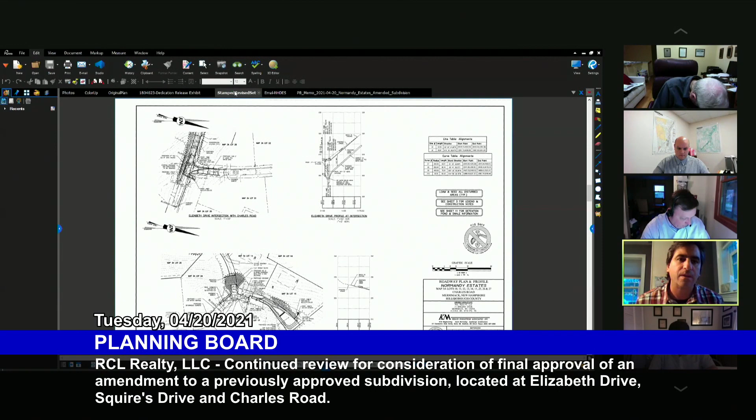Actually, first let me explain the utilities. The reason that this applicant originally came with overhead electric is that the underground electric in this neighborhood currently is not able to be utilized. The power company will not touch it. So that is why the plans originally had overhead coming down through the site. But listening to the abutters at the last hearing, plus board members, obviously, I'm here telling you that things have changed and you've got to give a little leeway to us.

Well, at the same time, things have changed and it was underground back in 1969 instead of above ground. So we agree that it makes sense to go underground here and keep it consistent throughout the neighborhood. So that's why we started originally with the overhead, but listening to what's there, we agree to go with the underground electric. Thank you for doing that.

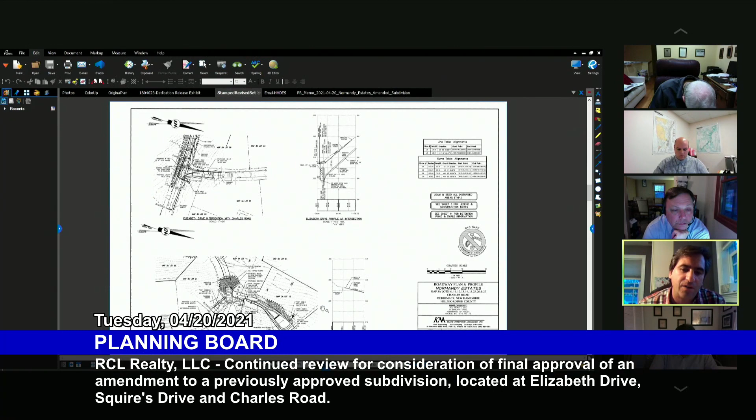At the last hearing, as Steve Keach has presented to you guys, and I did it the last time, we all kept saying, well, it's only 15 feet for 9%. I think the abutters brought up that the waiver is actually for above 8%. Where does the 8% happen from? So we went into the profiles here, and basically at station, it's right about 349. Right about here, as it goes under 8%, it gets like 7.94.

And then on the other side, it was 475. So it's about right here where it starts flattening out. So that gives us approximately 125 feet at over 8%. So instead of 15 at 9, it's 125 over 8%.

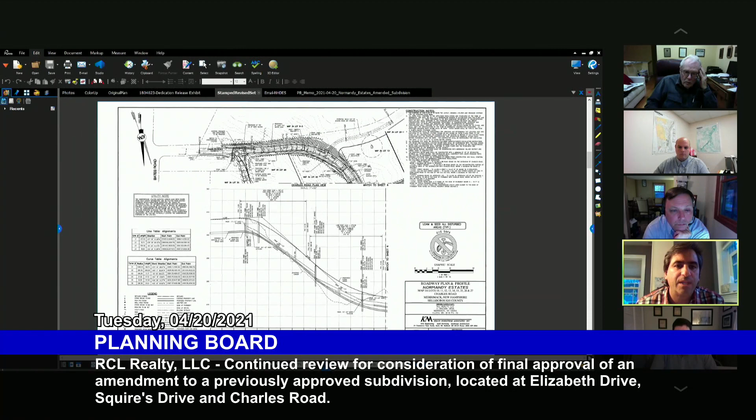The other location, and again, this comes back to Elizabeth, currently right now is a straight road through. And going through this process with DPW, we propose to tee that up at this location here. So currently, the dotted line is the current. Currently, it's about 9.1% as it comes up and around the corner. We're able to reduce it to 8.69 and create a stopping distance so that people are not cruising around the corner. And that is the waivers that we're asking for on the 9%.

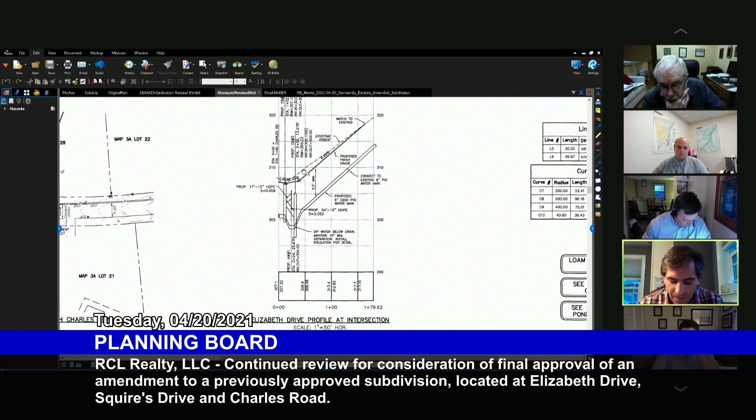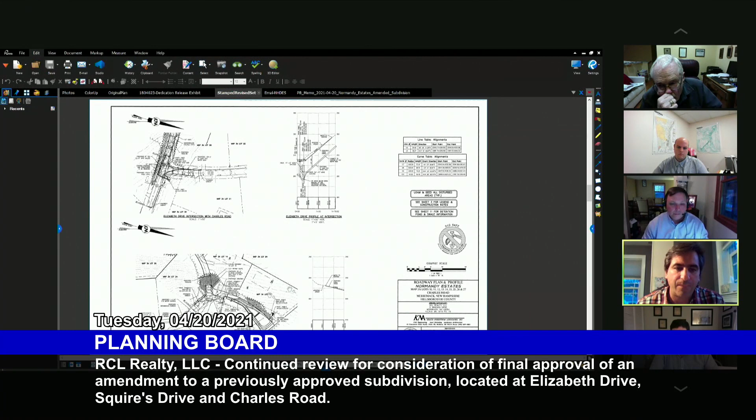The other one is related to cul-de-sac length. And that one is kind of clear here. Again, the total length to this point here is 1,450. We're allowed 1,200. So again, we're not coming down the majority of it from the cutoff on Elizabeth down to this road here. At the end of the cul-de-sac here is approximately 1,250. There's 1,100 right here. And from the end of Elizabeth, we start with our 0 at this point here, 150. So it's about 200. So our new road is approximately 900 feet out of that 1,450 distance.

Again, we're basing this development and design off the plans from 1969. Like I explained at the last hearing, we're moving a lot in this location here, combining them with doing some right-of-way stuff here, making the curve come down, obviously redoing Squires and cleaning up Elizabeth Drive at the end. Again, this has been a balance between working with DPW, the town, and staff to come up with something that fits a project that was approved back then, was half built out, and has rights to be finished and built out.

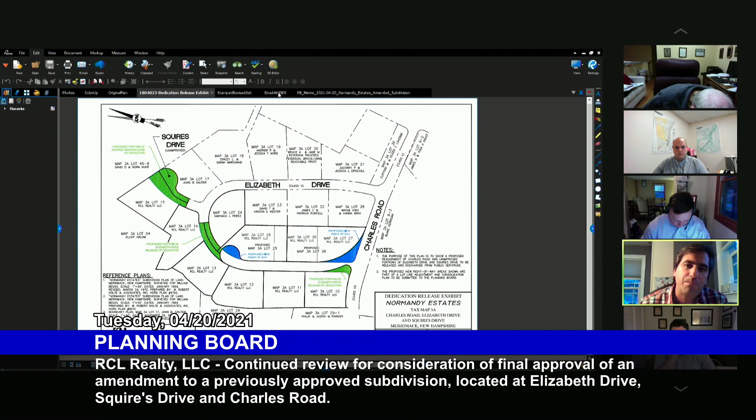Currently, from a review standpoint, we've gotten this email here from Gloria Andrews. She works at DES. She's reviewing our alteration of terrain permit. She had asked for a couple things on the sheets down in here. We had given them to her. All looks good. I'll put you on the expedited list for the New Hampshire Fish and Game.

I'm not sure if the board knows what happened last June with the New Hampshire Fish and Game, but they required everybody to do a wildlife study on their properties that had an alteration of terrain permit. They only had one person to review it. So currently she's got 16 applications in front of her, but we are all set from the drainage standpoint, the alteration of terrain standpoint, and she's working through the reviews. We had gotten some comments back in December, got them back to her December 18th, and are just waiting for her to work through.

I think that's my presentation tonight, and I'll take any comments or questions that you guys have and work it through from there. So thank you. Thank you, Matt, and thank you for taking into consideration the feedback you got from the board and the abutters with respect to the waiver request about utilities. I agree with that choice. I think that was a difficult waiver to support given what we require of other neighborhoods. So thank you for withdrawing the ones about underground utilities. And we'll take up the other ones that you requested in a little bit.

I want to let other board members have comments or questions about anything to do with the application, and then we'll talk about the waivers. Any comments or questions by members of the board? Let's see, I've got to arrange this so I can see all the names. Nelson, I see you. Well, just to follow up, I thank Matt for the changes he's made. I've got a couple of questions on it. I don't know if you want to go into those detailed questions now, but I agree with the suggestion on underground utilities. I think that's where I wanted to go, and it makes sense with what's there already, that we can continue that on the new Charles Road.

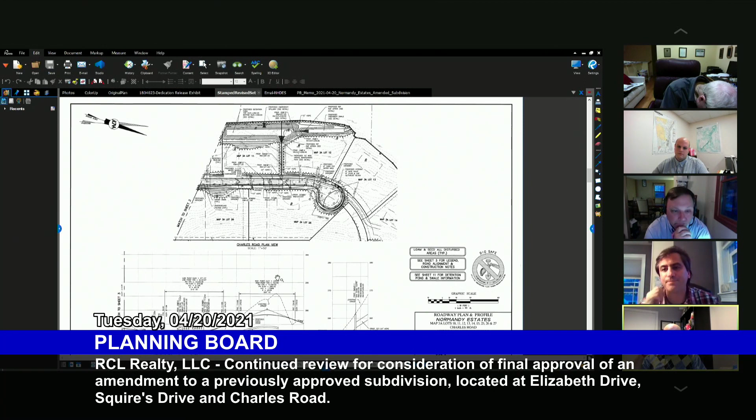And I'm looking at sheet 2 of 13 where parcel H, I think parcel H has that 10-foot wide pedestrian easement, but it still looks like that parcel J is going to be released from dedication. I guess, has that conversation been had? Is that still something fluid? Is it Pollyanna-ish on my regard to still float the idea? I guess I just would like to know what the applicant's perspective is on that, and then whether or not

it has a future. So I went and sat down with staff at one point to see what their thoughts were first. And it was something at the end of a road that doesn't make sense there. And then I talked to Greg Michael on how, again, it's the same problem I had with the detention pond on that piece beforehand. I'm encumbering it before I give it back to 3A lot 17. Those people are more than able to give it back to the town or do a conservation, do something like that if they would like to after the fact. But I cannot encumber what is their land to the center of the roadway at this point.

And that's why I had to put the pond over on this side from our last application and get everything completely off of that piece there. And this piece here, which goes back to 3A24, because again, that was a nice little spot to kind of come up and around that way. So I can't encumber their rights. They could come and do it, but I didn't have the ability to work with them, obviously, in this project. So what you're saying is that 3A17 still retains the fee to parcel J? Yeah, they'll be getting this parcel back. Have the owners of 3A17 been made aware of that? I do not know. I don't have an answer to that. Okay.

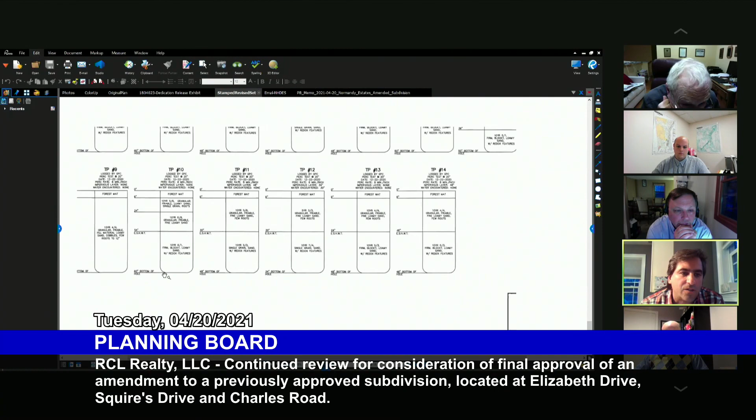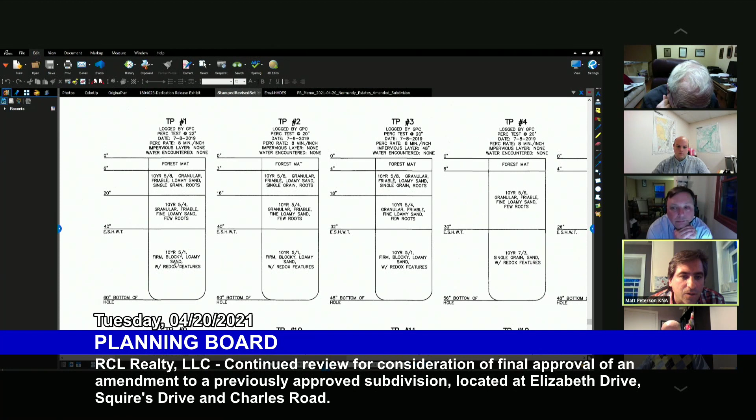Yeah, seasonal high waters average about 26 inches, 30 inches, 32, 40. That's pretty average, 36. Yeah. You get down here, we had one that was 24, 46, 54. Bottom of hole, 48, 60 inches. So no ledge hit there. So pretty standard. Yeah, no ledge, huh? No, I mean, you got loamy sand, granule loamy sand, and then a loamy, nothing where these ones were. Yeah. Okay, it may be something that goes back to the ancient past then that they were referring to.

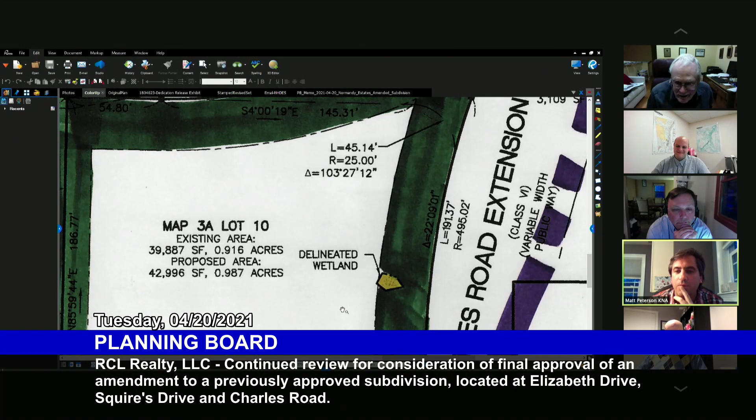I did want to talk about the other thing: are there wetlands anywhere on this site? Yes, I have one wetland on site. Okay, where is that? Right there. Oh. About 93 square feet. And I had to put a buffer around it of a 25 foot and a 40 there on the latest plans.

Okay. 93 square feet. Throw a bag of kitty litter in there and no, don't do that. No, don't do that. Yeah.

The existing Elizabeth Drive, was that built to town standards? The road that's in there. Not current town standard, because it's over 9%. I meant more in the subgrade and the foundation for the road. I don't have that answer for you. You don't know, but it's not your intention to do anything with it. But the new road you will build to town standards, the new Charles, and it will have the proper subgrade.

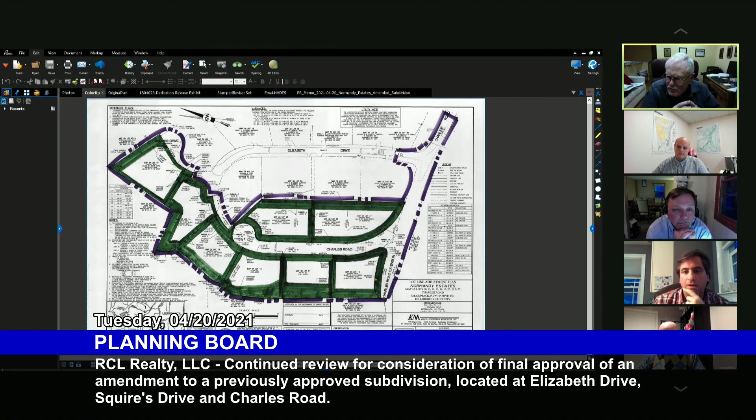There's a question about subgrade depth. Obviously, we're replacing this in here up to there, and then replacing the end with the turnaround here. And like I said, we're picking up the drainage to get drainage off the road and stuff like that. But no, the section between here and here was probably put in 1970, 72. I don't know. Yeah, and you will do current standards on the new Charles down south of, or I guess to the east of this. Yeah, I'm not asking for any waivers on that. No, okay.

The existing, has the town accepted Elizabeth as it is now? Is that an accepted town road? Would have to have been. They're maintaining it, yes. Well, yeah, I thought they probably were, but I just didn't know where their acceptance was. Wetlands, we've taken care of the wetlands.

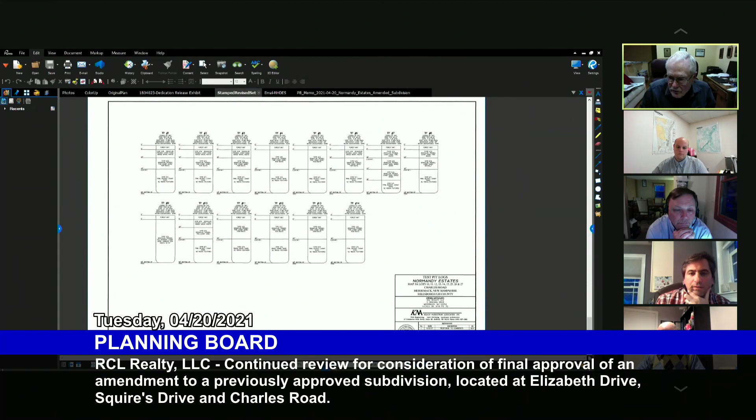There were issues with the, I think it's the cul-de-sac on Charles, where they talked about the drop off from the cul-de-sac and the presence or absence of fencing to prevent little children or bicycles. I thought I read that if the guardrail, let me just go back to plan here. I thought that statement was this slope here, that the guardrail should also have a fence because of this slope here. Okay, it was there. Yeah, okay. We've got guardrail that runs along this here. That's what's proposed, and that's what we're required to do.

Okay, I just don't know if we've ever put a fence behind guardrail. Pardon? I don't know that we've ever put a fence behind guardrail. Yeah. Does the same prevail around the hammerhead on Elizabeth? Up here we've got right there guardrail. There's guardrail. Okay, that's quite a drop off there, isn't it? Yep. It's existing. You can see a lot of this here too. Yeah, I had 2 to 1.

I had trouble with the lack of, let's say, an existing conditions plan on this site. I couldn't tell where those contours were, and I guess now we've got one blown up enough I can count up or down. Right. It's really hard to interpret from the copies I got. You got a lot more visibility on this. We'll say that.

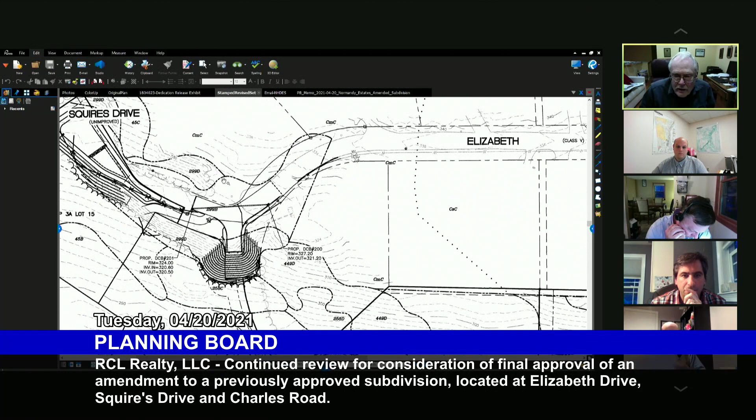The Squires Drive, I'm sure he'll talk about that, or you will. And oh, there's a piece of green space on here, but back up to the intersection, I think, of Elizabeth and Charles. Right in there, along Charles, there's a piece of property that's identified in the original plan as green space. And it doesn't seem to be part of anything we're talking about. Let's see, there you go, down, there you are, you got it. A green belt. Green belt, sorry, yeah.

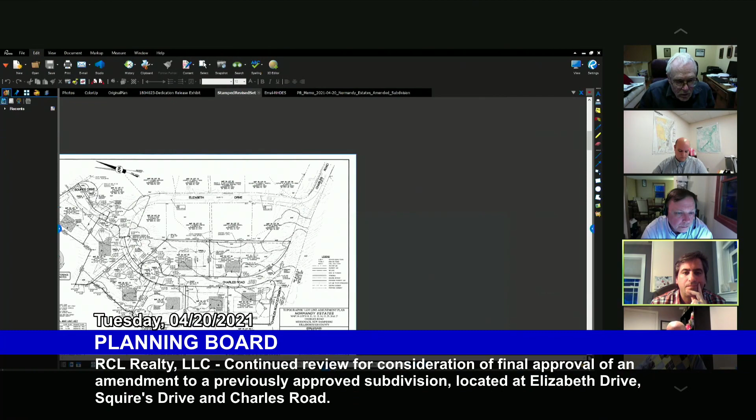So let's look at the stamp plan. So yep, that's shown here. Hold on a sec. So that's shown, so that'd be this belt right here, that line right there. Well, it's the piece of property that, yeah. I didn't put any owner on it here, so I don't know who the owner is there. I don't either. Is it part of this? It's not part of your plan in any way? Nope. Is it still green space that accrues to the?

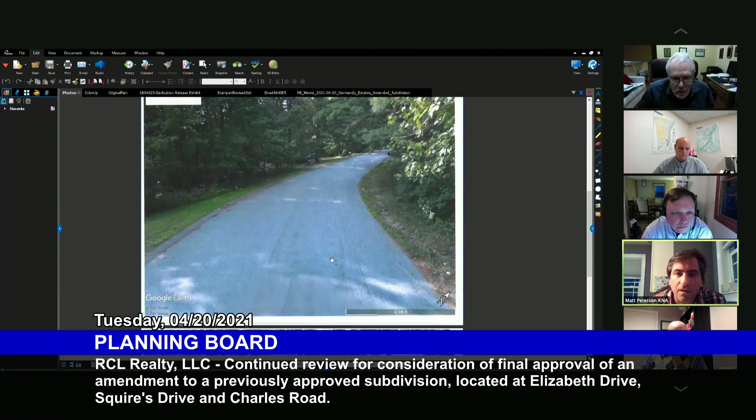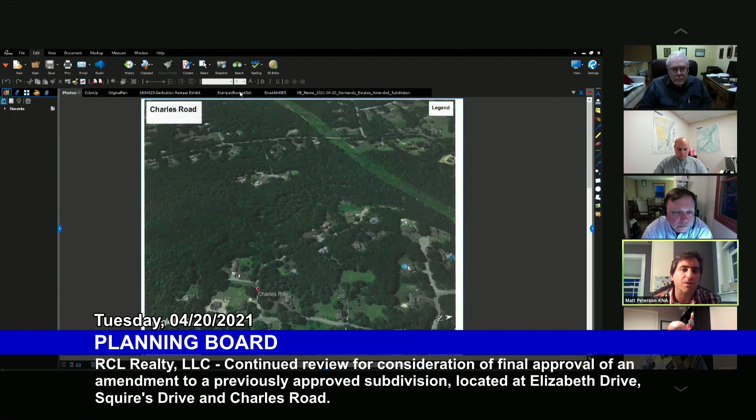From the photos, it sure looks like I've got street shots here. So that would be this area kind of on the side here. And then I guess it's over here. So I don't really have a good shot of it right there. The overhead probably has it. Well, it just looks like trees. Yeah. It appears, I mean, we're leaving it. We're not touching that up in there because this comes this way here and tees in now over in here. So we're actually creating a little bit more of it. Yeah, I know you did clip it a bit, I think, but.

I think they're unclipping it. It's curved to that now and they're straightening it out. Oh, they're straightening it out. Right. So here's the existing right there coming across. And we're actually going straight in. So increasing it. Slightly. Really just pulling it back in the right of way. Yeah, I just wondered if this was part of the homeowners association or something that went with the original subdivision.

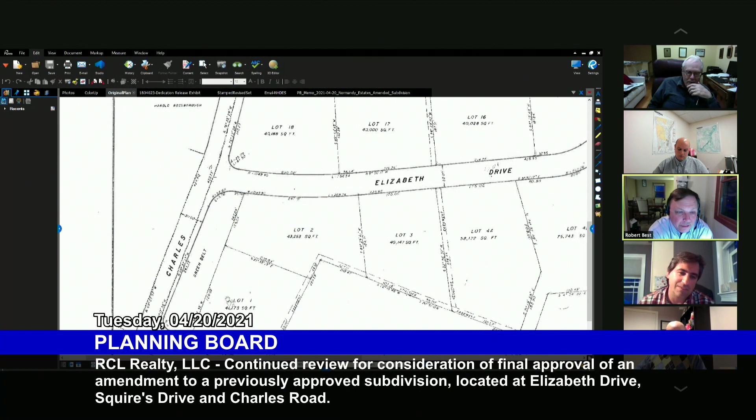It's pretty interesting that on the original plan, they actually called it green belt. Like they didn't even think in '69 they were doing that type of stuff. So no, they didn't give it a lot number or map number or anything. Nothing. Who's paying the taxes? I'm guessing nobody. Well, I guess I'd like to know more about that if you can do a little research there. That's about all I have for open items right now. Other members of the board have any?

All right. So board members, we can proceed in one of two directions for next. We could consider waiver requests, or we could take in some public testimony, and whichever one we do first, we'll do the other one second. What's your preference? I would prefer public testimony. As would I. Good enough for me. Let's open up the floor and hear if there's any abutters or interested citizens who wish to weigh in.

*9 will raise your hand. I see a raised hand. It doesn't have a phone number. It just says call in user number 1, but it's the only raised hand I see on the screen. So let's go with that one. Oh, I got 2 now. So go with call in user 1, hit *6, and then introduce yourself and tell us what's on your mind. Hello, Mr. Chairman. Can you hear me? Yes, we can. Please introduce yourself and then tell us your testimony. Mr. Chairman, my name is John Sauter. I live at 9 Elizabeth Drive, which is map 3A, lot 17 on your map. Oh, thank you. I'm glad you're here.

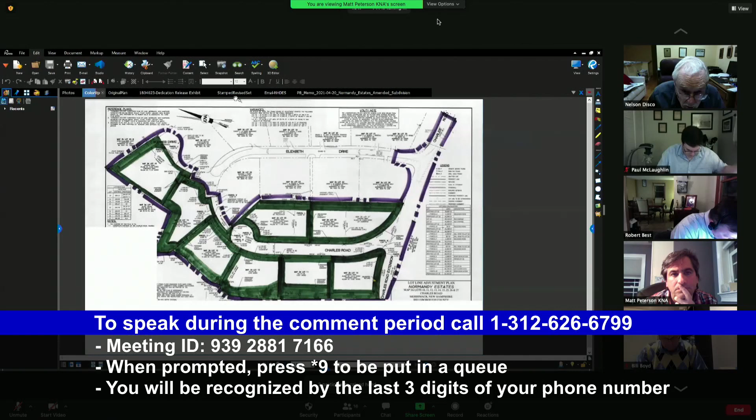Sure. James Ferreira, if everybody can hear me. I can. Thank you, James. All right. Thanks for allowing me to address some concerns that I have. One of the concerns that I have is I am an abutter to this proposed project, and my property is incorrectly identified, and it's actually showing ownership for my neighbor instead of myself. And that would be on page 3 of 15 in the PDF files on map 3A lot 45-8. I own 7 acres at the end of Squires Drive and basically own the entire PSNH, or whatever they're calling themselves, easement, where the power lines are.

Okay, so you're the owner of lot 45-8. 45-8. I gotcha. So my copy says David D. and Nora Hunt. And that's wrong. Indicating that's incorrect. Okay. Very much so. All right. Other information that you'd like the board to consider?

I do. So it just concerns me that the zoning board would approve maps with inconsistencies and inaccuracies. I think my previous colleague articulated them a little bit clearer, but there's a lot of inconsistencies with the plans that were provided for you guys to vote on something of this size and magnitude. I feel the inaccuracies should be kicked back to the zoning board for review, and proper things be laid out by RCL. I'm going to continue now. Purposes of variances should not be based exclusively on a desire to make more money out of a piece of property.

Local zoning boards do not have the authority to grant variances unless they first find that there is some peculiar condition of the land or structure not typically in the local zoning district that will create a hardship for the ownership. James, can I interrupt you for 1 second? I'll let you continue. Sure. And regardless of how you respond to what my comment is, I won't interrupt you and let you continue.

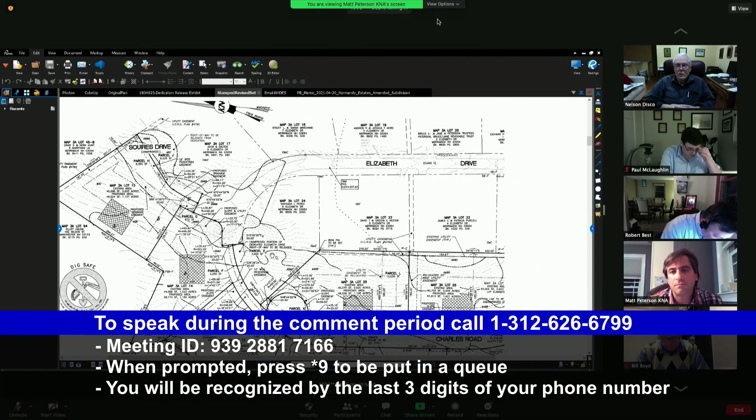So it's still not on the most recent plan, dated April 2nd, 2021. So we request that both driveway entrances be depicted on the applicant's plan so the planning board, the public, and the applicant will have the opportunity to study and comment on the impact of this proposal on all their driveways. And also request that no approval be made until that opportunity exists.

Thanks, Matt, for putting the underground utilities down Charles Road. Appreciate that. I still see a telephone pole at the end of Elizabeth Drive by lot 17. Is that still on the plan?

So offer the testimony that you'd like to, and we'll convey to Matt his opportunity to respond to all of it in the end. I apologize, yes. Anyway, thanks to Matt. And then we do have a question about why the utility pole is still on the plan, that one utility pole, and how power is getting to that. I know that Matt said that I think power now is going to get to lot 15 coming from some other direction. So I'm assuming that pole won't be used now.

The Town of Merrimack subdivision regulations, paragraph 4.05G, requires deed restrictions to be included in the plan. I haven't seen any deed restrictions included with the plan. The Town of Merrimack road and utility standards state that dead end and cul-de-sac streets not exceed 1,200 feet from an intersecting through street. The proposed L-shaped turnaround at the end of Elizabeth Drive is more than 1,200 feet from Bates Road. And I believe Bates Road should be depicted somewhere on the plan, so that anybody could measure the distance to the end of the Charles Road cul-de-sac and the end of the Elizabeth Drive turnaround.

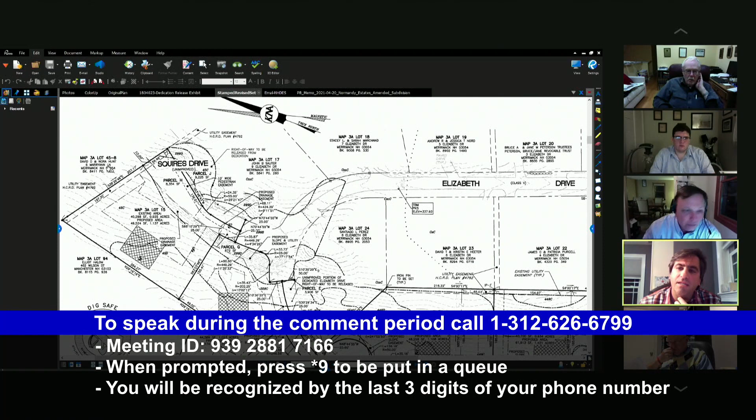So first thing, I just want to make it clear here, this 3A 45-8 is David Nora Hunt at 6 Marianne Lane. The town tax map is not very clear on the abutter here, so I also notified, he's the other one. So I also notified 458-1, who is James Ferreira, and he is at 7 Marianne Lane.

So, where the tax map and how we show the abutters here, it all comes down to the abutter notification. This is an abutter. He might have a boundary dispute that's shown different on the tax map. That's not up to me to resolve. I notify everybody so that I'm covered. So everybody should be here that was here.

Our plans, as you know, we do the best we can putting everything together. We're professionals that stamp these and have them reviewed by everybody. And you're right, I just looked at the cover sheet next to me, and it says Squires Road instead of Squires Drive. I guess I'd rather have those types of edits than anything major on the plans.

As I said beforehand, DES, which reviews our drainage and specifically the detention ponds and everything that's there, is all set with our project, except I've got to give them the easements for these two lots right here. They want to see them in the deed so that people that buy the property know that they're there. So the state's requiring that now.

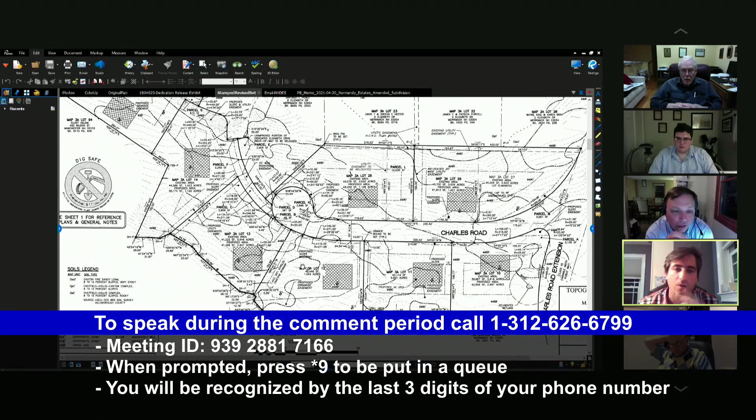So I did notify people there. Whether or not how the tax map's shown, that's not on me. Again, some of these lines, we show them as abutters. We don't survey, as you know, the abutting properties. We use tax maps to show approximate locations.

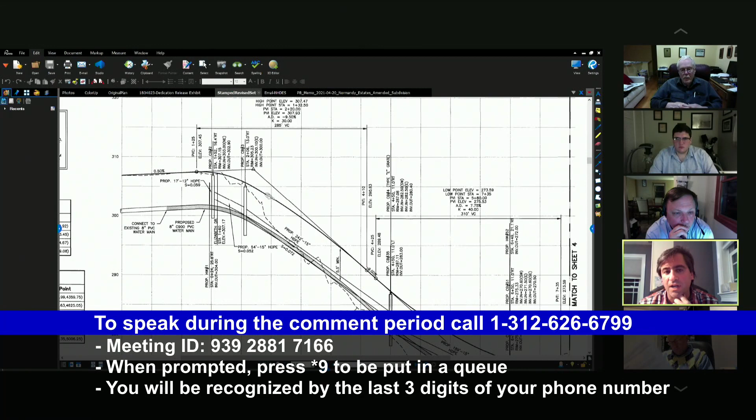As far as the grades and what we talked about on the roads, they're absolutely right. You come off of this thing and it drops. I mean, that's almost vertical. It might be 50% or so right there. So we're proposing a much more gradual slope coming off. As I said, it's 8%. It's under 8% to 350. So it's under 8% this whole way here compared to what they are dropping down right now.

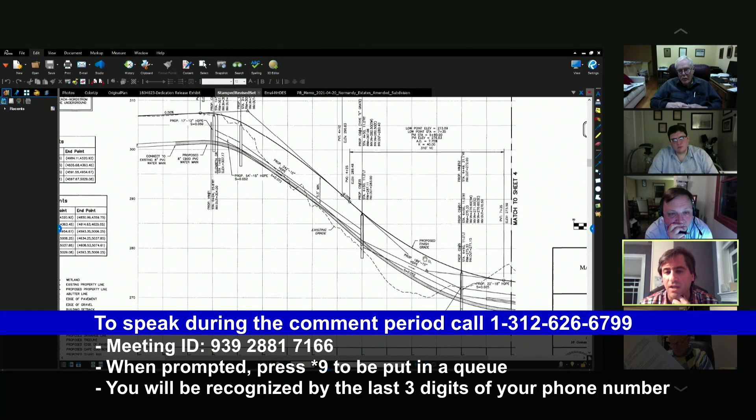Obviously, it's kind of equal once you get down there, and that's why we use the 8% and we're proposing this in our grade. It's matching what was down here. And then we're coming through and we have some cuts and fills on the back half here, but it's really just to get down this slope that's almost at 50% and make something that is safe.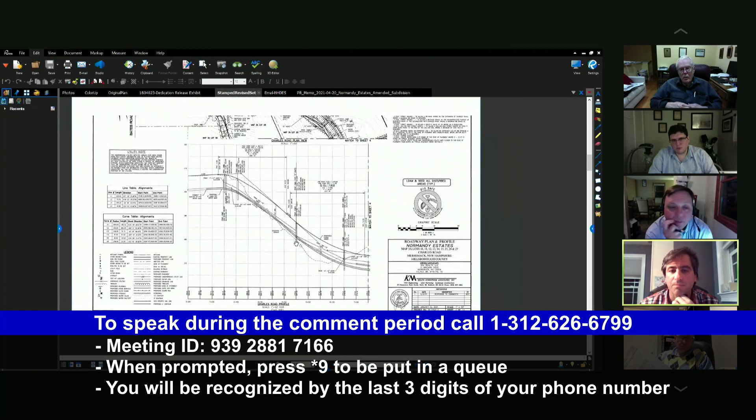Now, Matt, as I understand our standard, it's that you can't exceed 8% for greater than 600 feet. Is that what our standard specifies, or is that a road standard from a different source? I don't have that right here in front of me. Sorry, I thought it was 8% in general. Maybe Robert can take a look at that while we continue to talk.

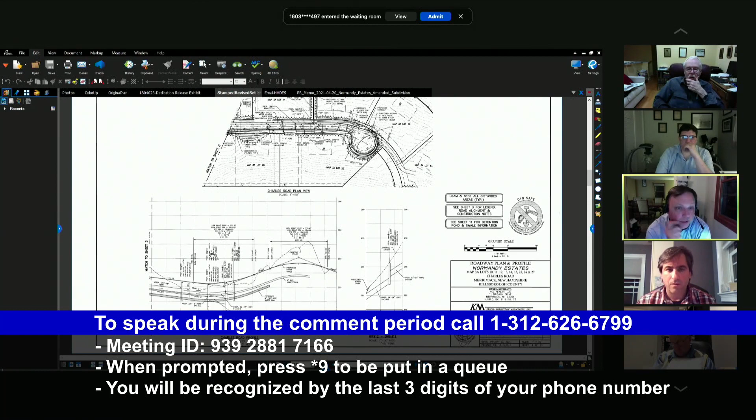But you mentioned earlier that you're above 8% for about 150 feet. 350 to 475, so about 125 feet. Yes. 125 feet above 8%, and 15 feet above 9%. Yes. Okay. I want to make sure that we understand what it is that we're talking about. Okay, please continue to respond to some of the comments we heard. Yep. So that was related to the steep slopes and the profile of the road. That was the abutter's address there.

Peterson at the end, the driveways, you're absolutely right, Mr. Chairman. They should be shown on it. I'm going to have a discussion with survey in the morning. The pole at the end of right here that he picked up in my plan, proposed utility pole location by others, that's removed. That's not where we're coming in. We're coming in this direction here.

I'm coming up with the utility underground to 15. Here's the driveway for 14, which would also have its electricity. The driveway for 15 is proposed to come off Elizabeth right here and come in. But the power will come off of Charles and come around this way. What I talked about, that slope beforehand, increasing the pedestrian access around that area.

Matt, while you're there, there's a pole that's been talked about in the discussions and some of the letters from Mr. Sauter and so on. Is that pole, that you're just showing right there, does that exist today, or was that originally part of something you were going to add? Right. This was a proposed one. It was going to go underground from this point in. So as I said at the previous presentation, there was going to be overhead electric run all the way down Elizabeth Drive.

And that's not happening anymore, and that will be removed from your plan. No way. There's another pole that they talked about. It had been hit by a couple of cars, and maybe it was out on Charles, or probably this one right here. Here's our proposed utility pole. Existing utility pole is out here. It's proposed. Yeah. I was looking for one that's already there. I went looking for it. I couldn't find it. That's why I asked the question here.

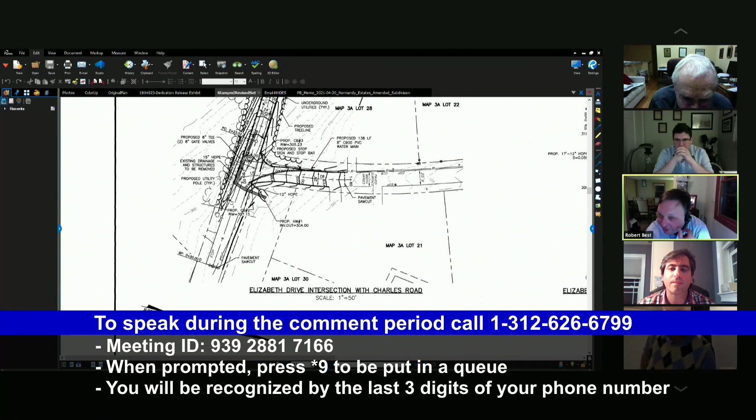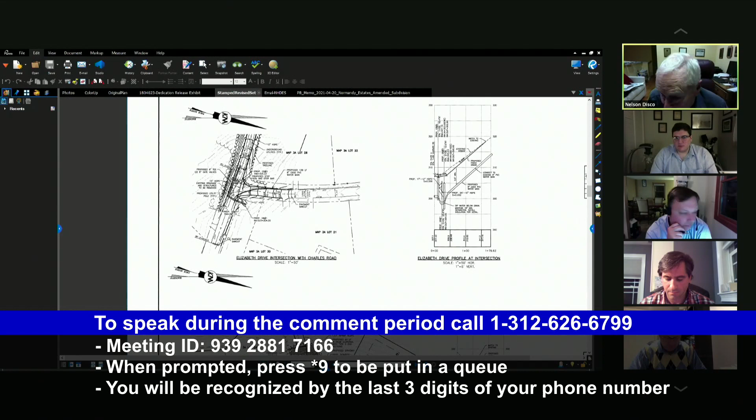You went looking for it, or the plan looking for it? Pardon? You went looking at the site or on the plan? I looked in both places and I can't find it. That's why I'm asking. Yeah, I didn't know if you'd actually gone out to visit the location. I gotcha. And I couldn't find a pole that had car markings on it because there was none that were that close to the road. But maybe one of the abutters knows where it is.

And then one of the things else I had from Peterson was on the cul-de-sac here. I think as the chairman said, here's this kind of makeshift bulb that they put at the end, I guess, to be able to turn around. So again, working with DPW, and I think we've heard tonight that this was probably maybe not put in with the full depth of subgrade and stuff like that. So obviously pulling it back to the end of it and redoing that and bringing the hammerhead down here.

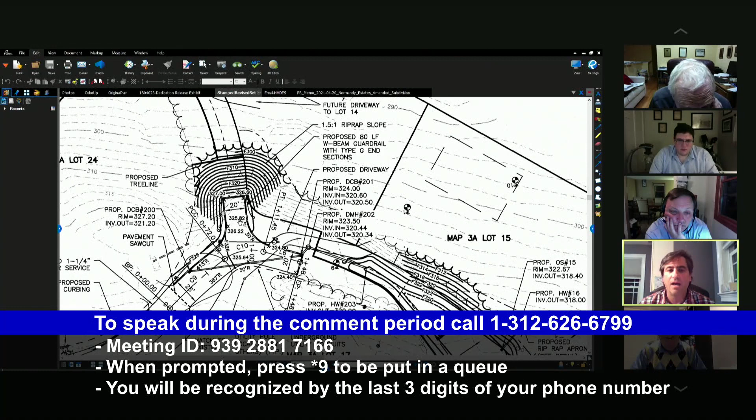From a green standpoint, this is much less pavement than when I put the cul-de-sac at the other side. So I hear you on both sides. Some people like cul-de-sacs, some people like hammerheads from a green standpoint. Again, this has been working with DPW on something that was there and coming up with something that makes sense at the end of the road. John Sauter's stuff.

You can make somebody unhappy. One of each, right? No, go ahead. I'm sorry. Okay, go ahead.

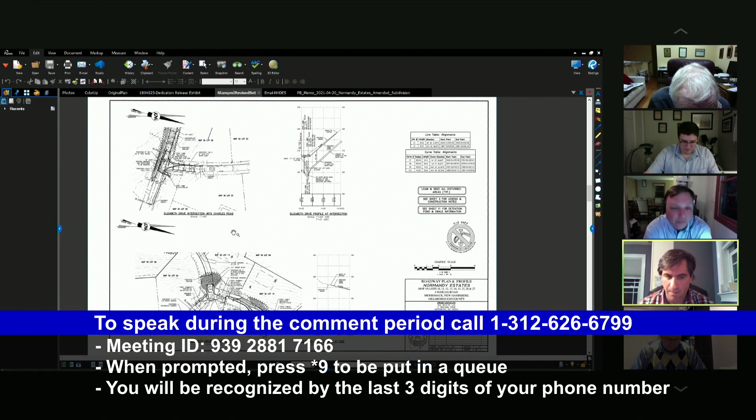John Sauter again went through a lot of the plan stuff there that is being reviewed by staff. Talked about the slope at the end here. What Nelson has talked about, this is the existing slope that's there. So we ended it basically where that slope was. We did put the riprap at the end here, but again, this guardrail is safety guardrail for roadways. And as far as pedestrians or kids jumping over it, yes, they could climb over any fence to do that. But this is very typical of a town road everywhere. It's safe and it's designed to meet all the town's requirements.

A lot of my stuff was that we're stamping everything with a PE stamp. Something happens, we're liable, we get sued. The review engineers have their PE stamps, the state as well. So I get it that there are some edits that we've missed on plans. That's why we have review engineers. I'll tell you straight up, I'm not perfect. And that's why we've gone through two reviews with everything here. And we've addressed everything that comes forward, as I have with everything else that we've done in town. So that's kind of where we're at with it. What else did I miss there, Robert?

Thank you. You covered quite a lot of it. Some of the comments early about things that were in drainage reports and sources of documents, I don't necessarily need to call on you to respond to it. That information is something that our peer review engineer takes into account when they provide us with a report as to whether it complies with our regulations or not. I certainly think that if the staff believes it's necessary, they can provide Mr. Sauter's feedback to Fuss and O'Neill to find out if it affects their opinions. But I wouldn't expect that it does.

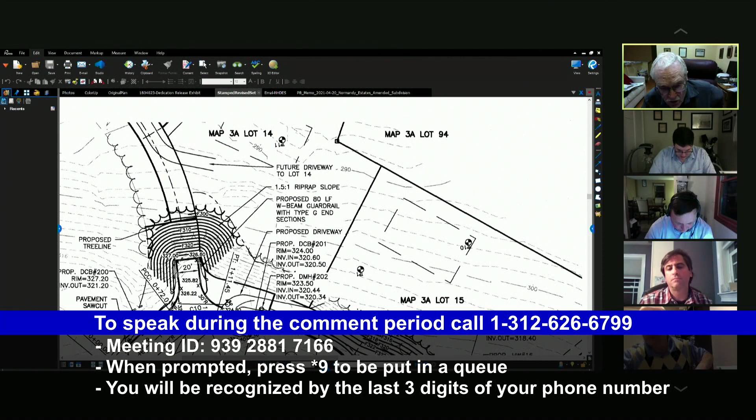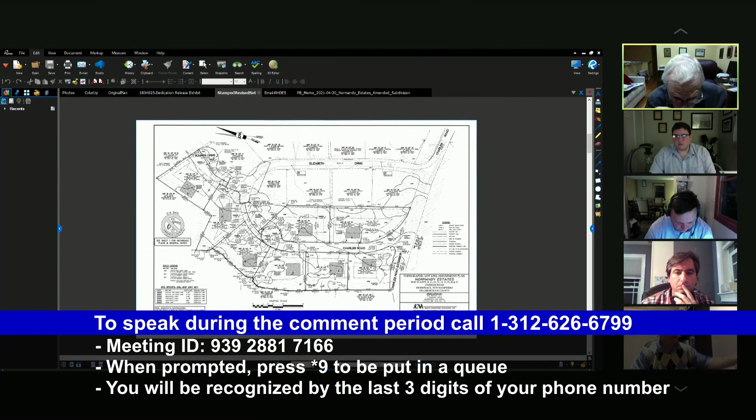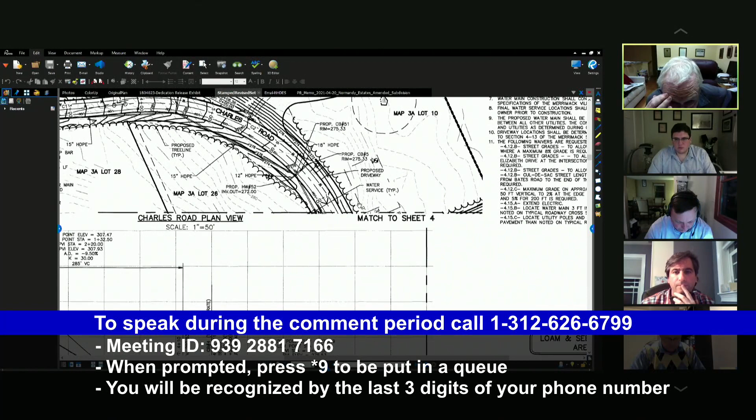With regard to the new Charles Road, the driveways to those houses that are going to be built on that piece of road, are they able to meet the driveway slope requirements of the town? I couldn't figure out the configuration. I know those lots are steep, and I just don't know how steep, and if they're going to run into some kind of problems when they try and build driveways through those. I think we have an 8% limit on driveways, a slope easement.

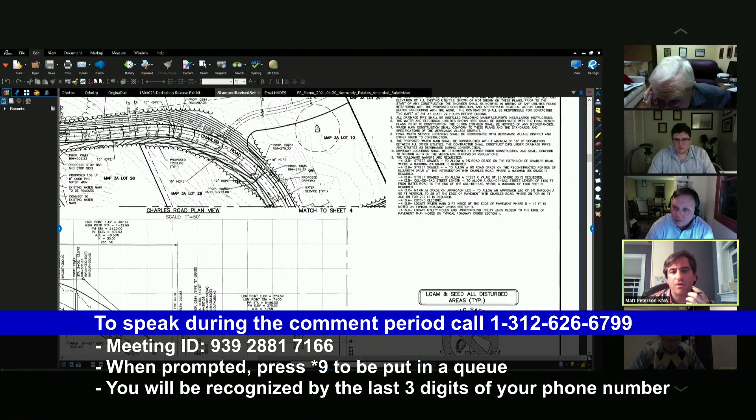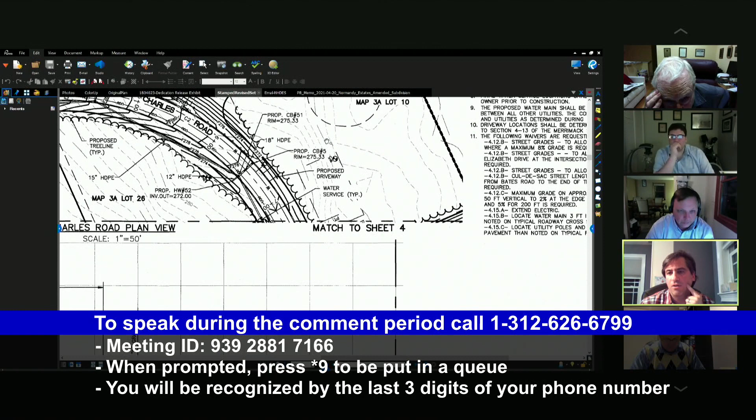So as you come around the corner on lot 10 right here, you can see there's no grade change between the road and here. So obviously driveway coming here, you drop in 8 feet here. This would most likely be a walkout in the back here, and you'd be at grade in your front as you put the house in at that location there. As you continue down the road, again, you're meeting grade. Here's where they're cut in here. You're meeting grade in this location here. You're meeting grade in this location here.

Now, driveways would come in this location here. This would probably be a split garage under, with your garage, with your driveways and stuff like that, and then have your second floor walk out in the back. Everything will be submitted to the town, not coming back with waivers on those driveways and stuff like that. Again, the land lays out beautifully for walkout and drive unders.

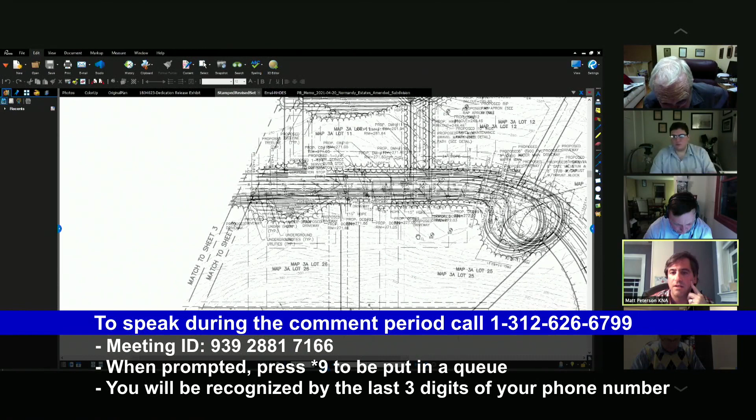I mean, again, here the road is sitting at an elevation of 272, 274. I'm at 260 right here. It's 14 feet. My house, I did a 9-foot walkout basement, and you're right on existing grade in the backyard there. Those are going down, and these are going down here, and then on this side here, these would be your drive unders coming into the front side, and then you go up to your second floor in the back. Okay, as long as they're aware of the regulations of the town.

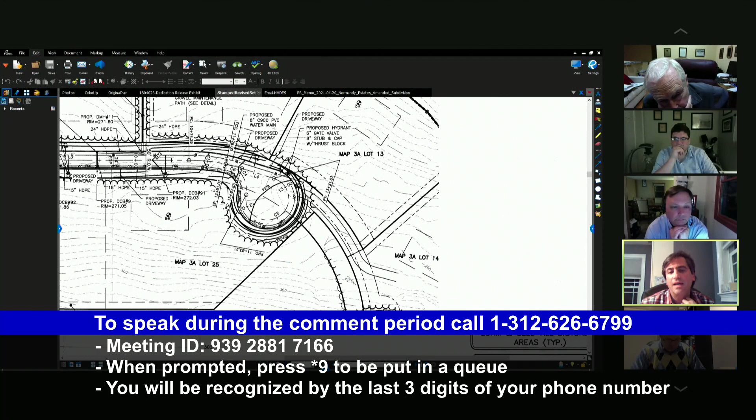And then just to make it clear, 13 and 14 here, this is the driveway coming into 14. You can see I go down to this and then back up here. So it drops 4 feet and back up 4 feet. Again, we're not dealing with that slope that they're talking about at the end of Elizabeth Drive. Yeah. That's what I was concerned about. Yeah. Okay.

Matt, I was just looking through all of the letters that Mr. Sauter had provided and making sure that I was satisfied with the responses that I heard to the items that caught my attention. There were a couple of other technical errors, misnaming roads or something like that. I assume those will all be cleaned up. Things that refer to plans that are given to the Hudson Department of Public Works instead of the Merrimack Department. I think some of those may have already been caught and cleaned up, but attend to all of those to make sure that we've got those typo type things dealt with and addressed.

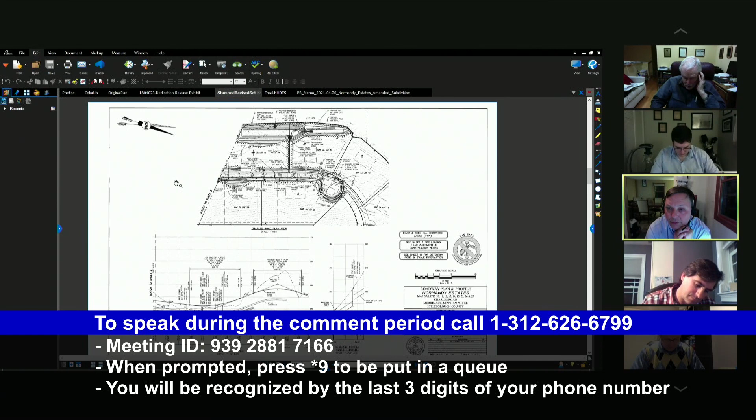Do other members of the board have comments or questions of the applicant or any of the feedback the applicant's given to the comments from the public? Okay, I see no board members raising their hands. And so at this time, let's take up the applicant's request for waivers. There are 2 general categories of waivers, one that has several waivers related to road design and one that has a single waiver related to construction of sidewalks.

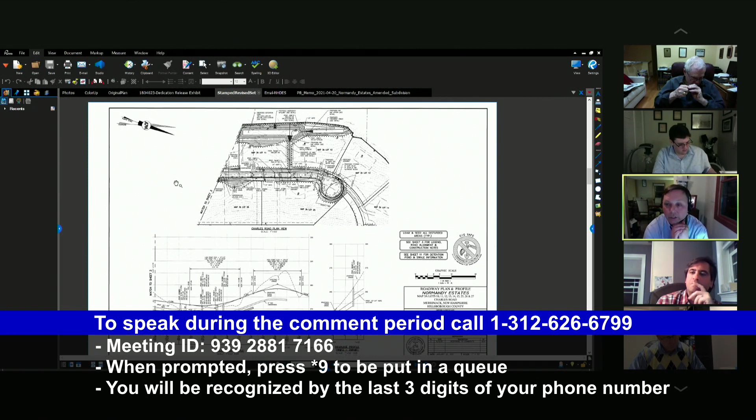Let's deal with sidewalks first. That is a request for a waiver from section 4.20.2, which requires a paved pedestrian way or sidewalk. And the staff notes that section 4.061R is likely the better section to have sought a waiver from, but both properly convey the intention to not construct a paved pedestrian way or sidewalk. The applicant's laid out his argument as to why he would like relief from that section. Discussion and or potential action. Floor is open.

Mr. Chairman, I would move that the planning board waive the pedestrian way or sidewalk requirement as strict conformity would pose an unnecessary hardship to the applicant, and the waiver would not be contrary to the spirit and intent of the regulations. Is there a second for Councilor Boyd's motion? Second that motion. Second by Paul McLaughlin. Any further discussion? Then let's do a roll call vote.

Nelson Disco. I vote in favor of this motion. Bill Boyd. Boyd votes aye. Paul McLaughlin. I vote aye. Bob Best votes aye as well. 4-0-0 to grant the sidewalk waiver.

The initially requested waivers regarding utilities have all been withdrawn, and so we've got 3 waivers related to road construction, which we can decide to deal with one at a time or in group, as they're all somewhat related. The waivers are 4.12B, which requires street grades not exceed 8% and a K value of 30; Section 4.12C, which requires a maximum cul-de-sac length of 1,200 feet in length; and 4.12D, which requires a maximum grade on an approach leg of 5%. Any discussion by members of the board?

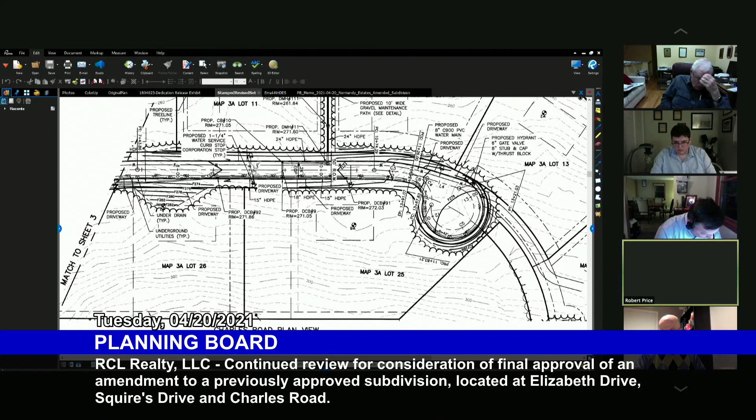The one thing that I did notice was the village district's requirement to put in a fire hydrant at station 600, which I assume is 600 along the Charles Road extension. Robert Price, is that correct? Where that hydrant will go if the village district's advice is accepted? Their comments came in late after review was done. I was able to stick them in the memo, so I did not look at that honestly. Okay.

So let me make sure I can identify where station 600 is. Here we go, 600. It's right in the curve of Charles Road in front of 3A Lot 10, or 3A Lot 26. So for background purposes on that, the purpose of this limitation on the length of dead-end roads is to support the fire department in their ability to provide service to remote areas. And a fire hydrant usually supports the granting of a waiver for a lengthy road because it provides a water source that is closer than the end of the road or the main street. With that in mind, as to all of these waivers, we can deal with them as you like, board members. There's a slope, there's a road length, and there's an approach leg waiver.

Excuse me, Bob, but what is the request regarding the hydrant? They want to put one in? Nope, there's no request regarding a waiver regarding a hydrant. There's a waiver with respect to our limitation of a road length. And road length waivers are usually related to fire department service and how far they would have to go to get water. Okay. With a hydrant constructed along the roadway, that's typically something that the board has taken into account in considering whether to grant one of those waivers. That's the only reason for going into that discussion. So what are they asking for now with regard to the hydrant? They're asking for no waiver for the hydrant. They want a roadway that's 1,450 feet long, where we normally limit it to 1,200.

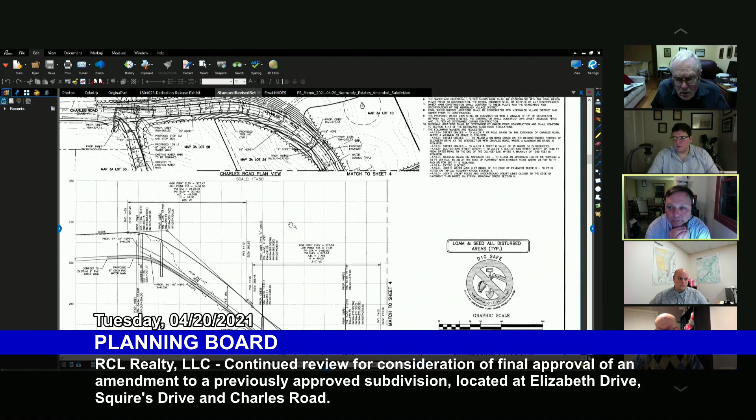I'm still confused. I'm sorry. Are we going to add a hydrant? Are they asking us to move the hydrant? Are they asking for another one? No waivers are requested with respect to the hydrant. The Merrimack Village District has listed in their requested comments, which we would include as a condition of approval, that a hydrant would be put at station 600. A second one. Yeah. Okay. And we've got no problem with that, right? No problem with it at all.

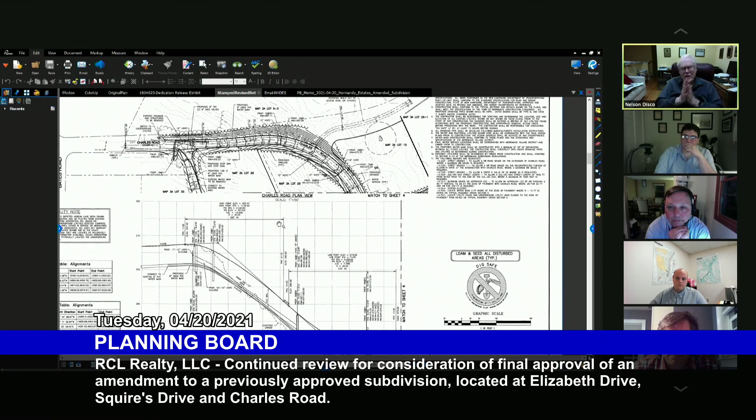Okay. All right. I just didn't understand. Thank you. Sure. I'm sorry if I was confusing with that. Again, it's typically a consideration when we think about maximum road length. Yeah. How far will the fire department have to go to get water? Yeah.

And if there was no water in the area, we might approach a waiver request in one way. Mm-hmm. And if there's water available, we might approach it in another way. Right. That's the whole reason for connecting the two. Gotcha. With that in mind, what is the will of the board with respect to any or all of the remaining roadway design waivers?

Mr. Chairman, I would move that the planning board provide a waiver as it relates to section 4.12.b, 4.12.c, and 4.12.d as specific circumstances relative to the subdivision or conditions of the land in such subdivision indicate that the waiver will properly carry out the spirit and intent of the regulations. Is there a second for Councilor Boyd's motion? Nelson Disco has his hand up to offer a second.

Further discussion? Paul McLaughlin, how do you vote? Vote aye. Bill Boyd? Boyd votes aye. Nelson Disco? I vote aye. Bob Best votes aye as well. 4-0-0 to grant the 3 waivers related to road design.

Is there other information that the planning board members would like to discuss? Are there any conditions of approval that we heard tonight that we discussed with the applicant that we would like to add to the ones that the staff outlined for us? Or are the ones that we heard tonight already covered by the staff's comments?

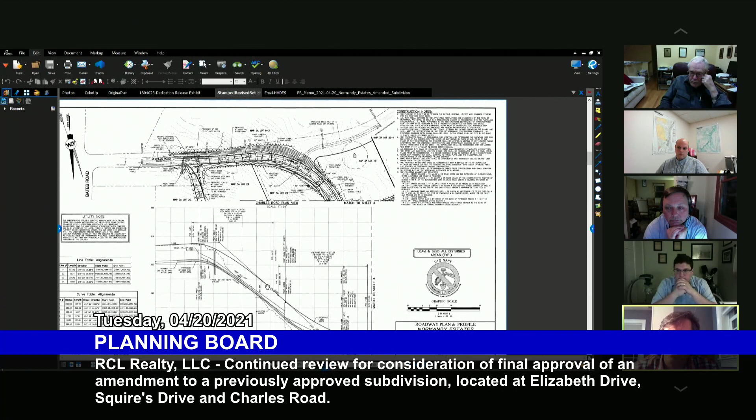And like Robert already said, probably already have a path somewhat knocked down from there. And then going around the slope that we talked about. So I envisioned it as more in the woods and the nature and the green, and definitely was not envisioning paving it and having to salt it or sand it and make sure people aren't hurting themselves out there. So sorry if I misrepresented that, but that's how we intended it.

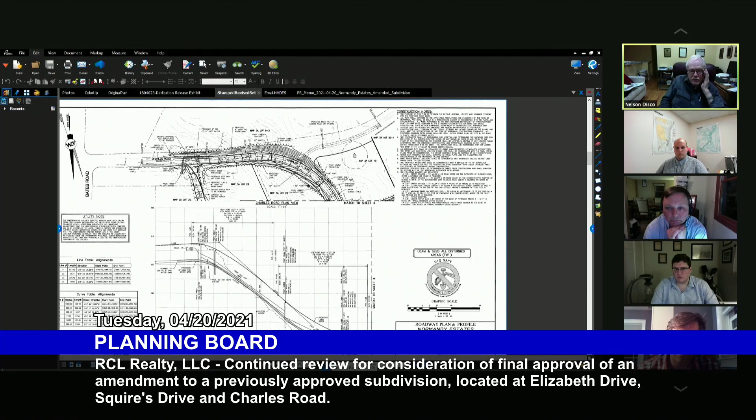I just wanted it to be clearly defined some way on the ground so that I'm not looking for pavement either so much as a clear. I can flag this line or something for you. I have it shown on here as a pedestrian way, 10-foot wide pedestrian easement. I can flag it in the field after construction, or we do those little conservation plaques. I could just put one every 50 feet. It'd be about 2 of them.

And then it's got to connect to the one coming off of Elizabeth. Well, this is all right-of-way, so that's all easy. This is all town right-of-way. So they connect just right here. Yeah, that Elizabeth part is paved. Yeah, they'll be paved here and here. It's only this little section between that'll be grass. If they want to turn around and go back the same way, they can just turn around the cul-de-sac. Yep. And the Squires Drive piece has got another 10-foot wide easement, which we talked about before as well.

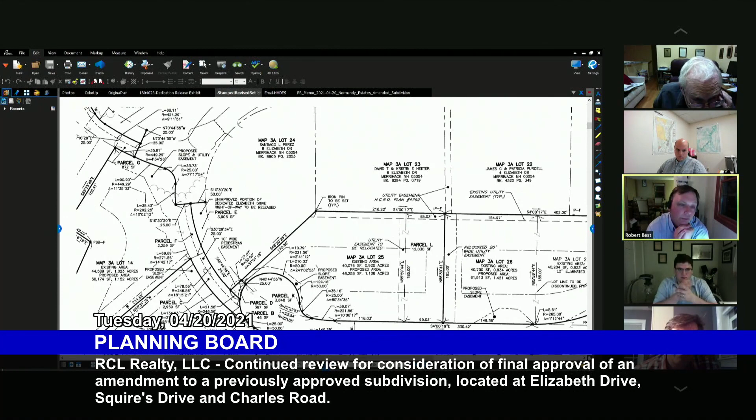My view of this is 2 things. It seems to be consistent with the use that the neighbors have made of it, that it's a trail in the woods for recreational purposes and intended to stay that way. The other view of it that I have is that this is generally an accommodation that the neighbors have made.

I think Bill got logged out.

Let's admit him again. An accommodation that the developers have made in order to provide a little goodwill towards the neighbors, but especially the Squires Drive piece, a recreational trail that leads to a power line easement, I continue to hold as outside our jurisdiction to require of the applicant. If the applicant's chosen to provide it, I think we can certainly accept it and include it in a plan. But I don't believe that it's an appropriate approach for the planning board to give access to an abutting parcel with no indication that the abutting parcel wishes to have pedestrians on it. A pretty good indication that they probably don't.

With that in mind, I think that accepting it as an accommodation that the applicant has decided to do in the spirit of goodwill for the benefit of the neighbors is where we should leave it. My 2 cents. Okay. Other comments or questions? I just wanted to show it and be clear about it.

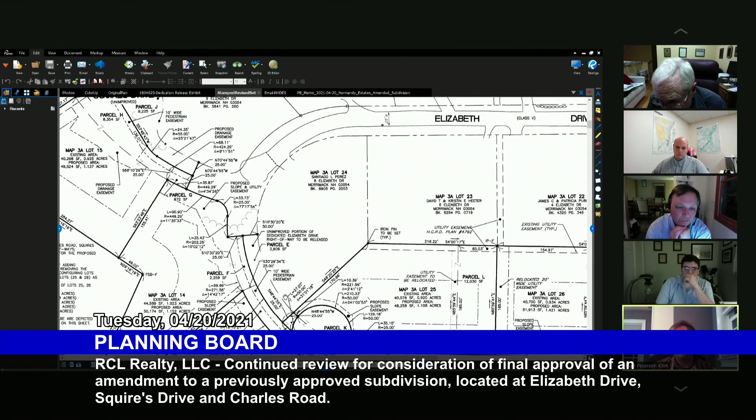You see, if you look at the cul-de-sac at the end of Charles, it looks like it's coming off about 10 o'clock on the right. And when Matt showed us, I thought he had it over on the other side. Yeah, I think Matt showed us that it wouldn't come off at 10 o'clock, that he's got to come around a little bit and wrap it around to do the slope. But it's 10 o'clock here, and then, like you said, the plan flips, so here it's 2 o'clock. Yeah. Sorry. They're both in the same location, it's just that they're flipped.

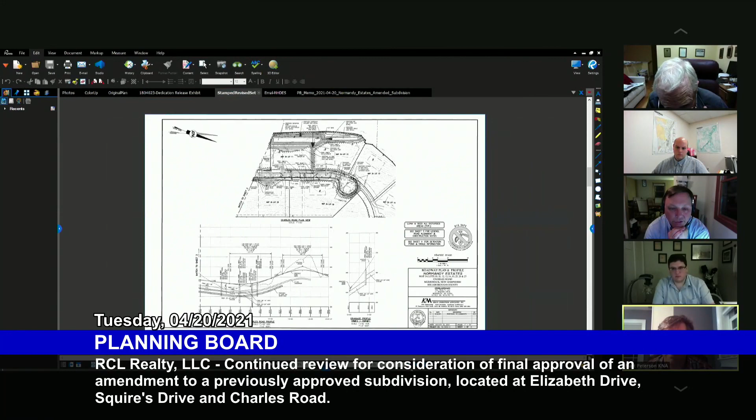I got you. Where's the area where you said you had to adjust the route of the pedestrian way for the slopes? That's up on the other one. That's on the Hammerhead piece or Squires Drive piece? That's right here. So I want to come up the easement that I showed you there and then come around it up in here. So this is where we're going to bring the utility to map 15 here. Oh, yeah, okay. I was on the wrong place. Okay. I flipped it. It's confusing.

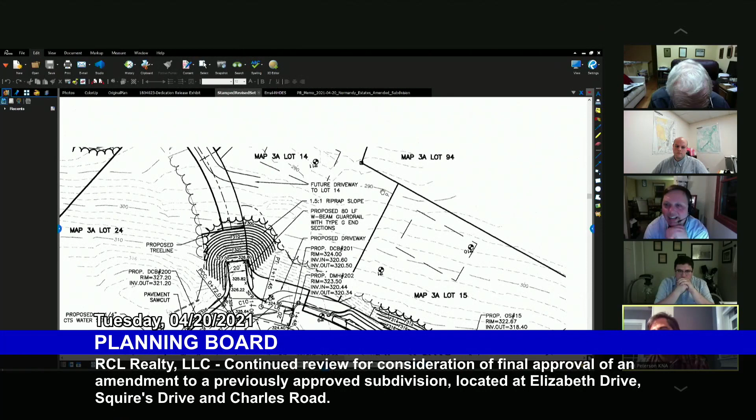Certainly on a final plan, there should be a line of where you want the pedestrian easement to be. Well, like I said, I've got it on the plan. I didn't connect it over to here. So there's already this easement right here that goes down like this. This is the utility easement for the access of 15. I didn't realize this was rock. That's all. It's just going to connect right here to this easement and come around the bottom half.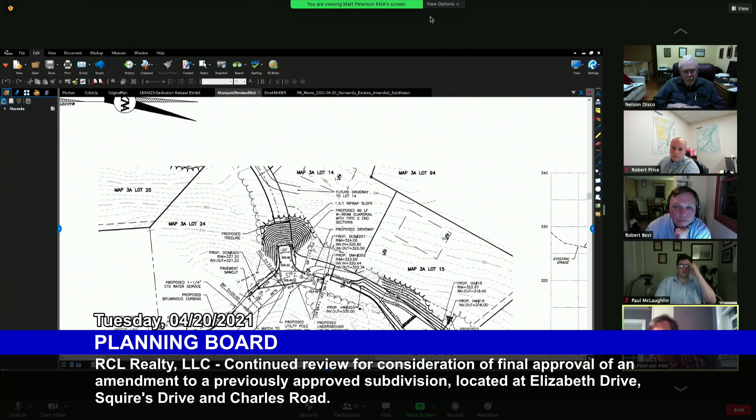So I got to put a little... This was 10 feet. That's 25 feet wide. So I got to put a 15 foot in there. So long as we have some markings in the field as well that defines it, I guess that is my okay. The idea of putting a little trail plaque here and there, I think, is certainly satisfactory, just to remind people 20 years from now that they do have not just a trail through the woods, but a right to a trail through the woods.

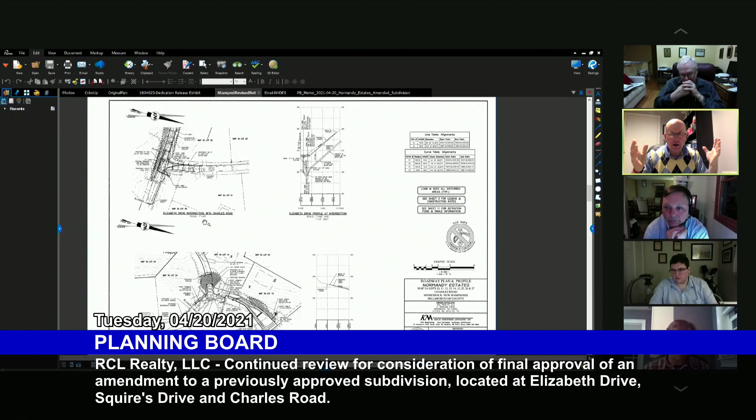Let me do a little bit of housekeeping. Councilor Boyd, you dropped out and came back a couple of times. Is there any part of the discussion you missed that you want to make sure we cover so that your participation is not affected? I apologize for dropping out. I had no idea what was happening. I don't know what I missed, but I don't think, and I say this with respect to the applicant and Mr. Peterson, I don't think what I missed is salient to how I've thought about the project.

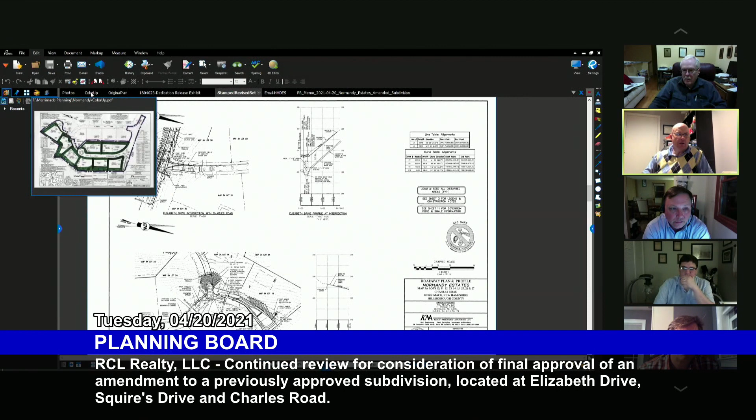So. Okay. Generally, the last few minutes have been a discussion from Nelson about the location of the pedestrian trail, woods trail, okay. And that it be marked on the map, marked on the ground, and that it be available for people, but not paved. I think that's appropriate. I think Matt knows that I had some concerns about wanting to maintain that, and as long as there's consensus that that's appropriate, then I'm on board. Okay, good. Other discussion by members of the board? What would the board like to do in terms of any potential final disposition of the application? If there's nobody on the board that's willing to make a determination for a final disposition, then what other action would the board like to take?

Mr. Chairman, I would move that the planning board approves staff's recommendation that the board grant conditional final approval to the application with the following precedent conditions to be fulfilled within 6 months and prior to the plan signing unless otherwise specified. All of the items that are reflected in the April 16th, 2021 memorandum to Robert Best, Chairman and members of the planning board, from Robert Price, Planning and Zoning Administrator, with the caveat that what has been addressed in this memorandum be redacted and any additional items of concern that have been raised through public testimony tonight be incorporated and be fulfilled by staff and the applicant and Mr. Peterson. Thank you for the motion, Bill.

You mentioned that the staff's memo might be in some way redacted. Is there a particular redaction you're looking for, or do you just mean augmented with the new information from tonight? Well, waiver number 4, section 4.15.a requires all utilities to be underground. Ah, yes, I gotcha. Stuff in there that we covered. So I'm asking the planning board to rely on Mr. Price to basically take a black magic marker and redact the stuff that we covered. That is, the waivers. Perfect. The waivers that have been withdrawn are not part of the approval. Correct. Is there a second for Councilor Boyd's motion?

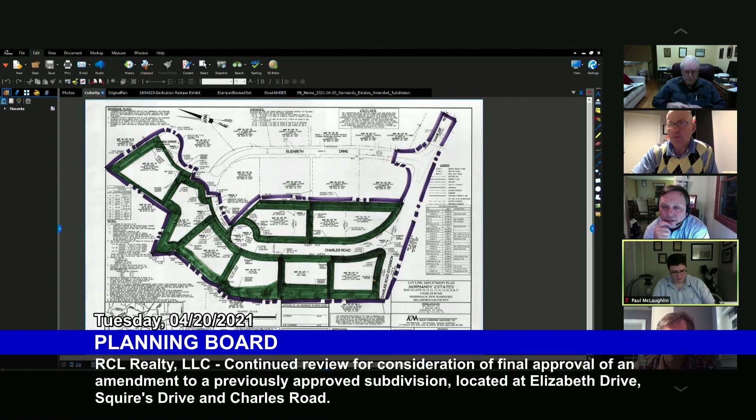I'll second that. Nelson Disco offers a second. Further discussion? If there's no further discussion, then Paul McLaughlin, how do you vote? I vote aye. Bill Boyd? Boyd votes aye. Nelson Disco? Aye. I vote aye as well. 4-0-0 to grant conditional final approval to the application subject to all the conditions in the staff memo and any additions we made here tonight. Robert, is there anything else we need to do before we move on to the next agenda item? No, Mr. Chair.

Then item number 4 on our agenda. Good night, guys. Have a great night. Thank you, Matt. Thank you for the presentation. And thank you to the members of the public for offering their input as well. It was very helpful.

Point of personal privilege. Yes, please. Since this is, well, it's not potential. This is going to be my last meeting on the planning board, Matt. I just want to say for the times that I've been on the planning board working with you and everybody at Keach Nordstrom, you guys are nothing but professional. You answer all of our questions, and I wish you nothing but the best of success for you personally and for the entire firm for the future. It's been a personal privilege working with you, so thank you.

I appreciate that. Thank you. It's been the same pleasure back at you. So have a good night, guys. Have a good week. Well said, Councilor.

Okay, item 4 on the agenda is the John Flatley Company as the applicant and Gilbert Crossing LLC and John J. Flatley as the owner. Continued review for consideration of an amendment to a previously approved mixed-use development conditional use permit to permit 96 additional multifamily residential units. The parcels are located at 645, 673, 685, 703, and 707 Daniel Webster Highway and 5 Gilbert Drive in the I-1 Industrial, Aquifer Conservation and Wellhead Protection Districts. Tax map 6E, lots 31, 33, 34, 35, 36, and 37. Case Planning Board 2021-12. It is continued from the April 6, 2021 Planning Board meeting.

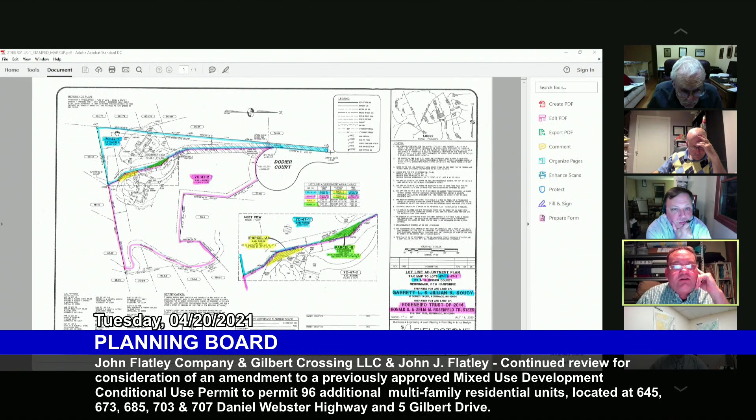So, Mr. Rosenfeld is the owner of 7C47-2, which is this pink outlined lot right here. It's a pre-existing non-conforming lot of record. Mr. Soucy is the owner of the blue lot 7C47-1, which is right here as well. If we zoom in on the detail, you'll see parcel A is the yellow area. There's some encroachment of Mr. Rosenfeld's lot onto Mr. Soucy's lot with fencing, and it's fairly close. There's a stockade fence with a concrete patio area. And there's also a generator here.

You can see this dashed line right there. That is the existing lot line as it exists today. And it keeps going straight right up through here and goes back onto the existing line. So basically what we were proposing was parcel A and parcel B, whereas parcel A would be conveyed from Mr. Soucy to Mr. Rosenfeld to clear up this encroachment. And parcel B would be conveyed to Mr. Soucy from Mr. Rosenfeld, which is the green area. And they're both equal area swaps of 1,057 square feet. So it's a pretty innocuous lot line revision, just trying to fix a problem that exists right now.

I mean, what more can I say about it? It's pretty straightforward. Yeah, it is. Thank you for explaining it, and thank you for color coding it. It really helps us understand it. Also, my applause and pat on the back to the two neighbors for coming up with a solution to an innocent kind of problem that people occasionally run into, and rather than duking it out, they figured out a solution. Kudos to them for doing it. Definitely deserve that. Simple enough to understand.

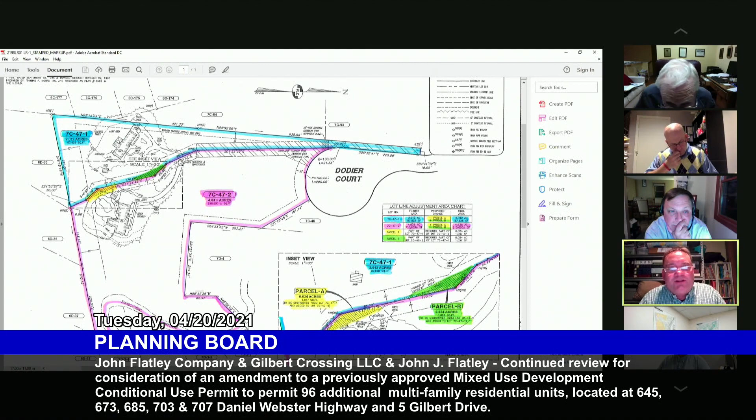As I looked at the map, I noticed this earlier today, but didn't comment on it until just now. Does lot 7C47-1 encroach onto 7C54? There does seem to be a small encroachment with the gravel area right here and a little bit of the paved area. However, I guess that would be the next application if they were to resolve that. But it's not part of this application.

Okay. Our approach to that generally in the past has been to make sure that there's a note on the plan to indicate that the planning board's approval does not constitute approval of any pre-existing encroachments that may be on the plan. So the normal approach is just to put a note to say that exists. We're looking at something else. Our approval doesn't touch that. Okay. But the board's got to have a comfort level with doing that too, and not sort of telling you to resolve that too while you're here.

Further discussion by members of the board. Where's the driveway location? The driveway location, they come together right here, and it does come outside a little bit and then back into the easement right here. So the existing driveway location isn't in the easement of record? Not entirely, no. Okay. That should be something that's attended to and fixed as a part of this proposal as well. That the easement area is adjusted or relocated so that it now encompasses the driveway. Move the easement, not the driveway, if you follow what I'm saying.

Right, and we have counsel involved with this as we've been going forward here, so that's certainly something that we can address. Okay, and then the driveway location should show on the plan the whole way. Yeah. What'd you say, Nelson? I said yes. I agree. Okay, so the driveway location goes a little east of the easement area and then returns back to where it was. Correct. How did that come to happen that way?

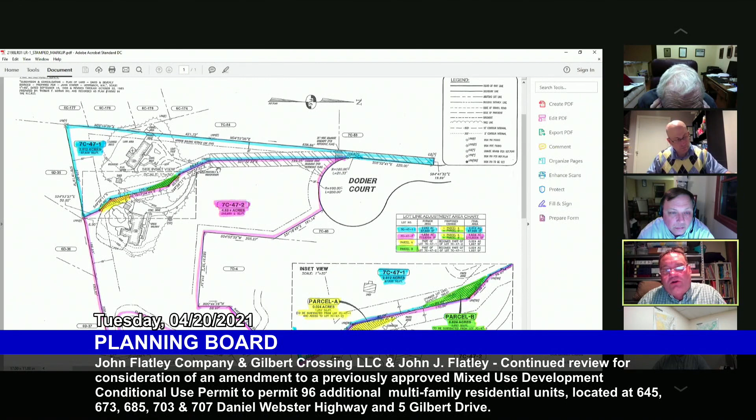The western boundary is up here. Yeah. And the eastern boundary is right there. And it'd be pretty simple. We just didn't locate everything all the way down to the road. We're concentrating in this area here. We can certainly show that drive going here, and certainly show the revised easement on the final plan. Yeah. Now, although we're calling it an easement, there's actually two easements. The pink lot has an easement in favor of the blue one, and the blue one's got an easement in favor of the pink one.

If the driveway is not located in the blue easement at all, frankly, for my purposes, it could go away, unless the applicants have some reason for it to exist. If the driveway is completely located on the pink lot, then the pink lot should have an easement to benefit the blue lot, if that makes sense. Okay. In that case, I would recommend that we send it back to the ZBA next and let them straighten it all out at once.

We don't know exactly what they want to do. I don't think this surveyor knows either. Other comments or questions? And if not, is someone willing to make a motion? So, planning board, Bob, through you to Robert. Zoning board, is this going to be before the zoning board next week, or are we looking at the month of May that they'd be going to the ZBA?

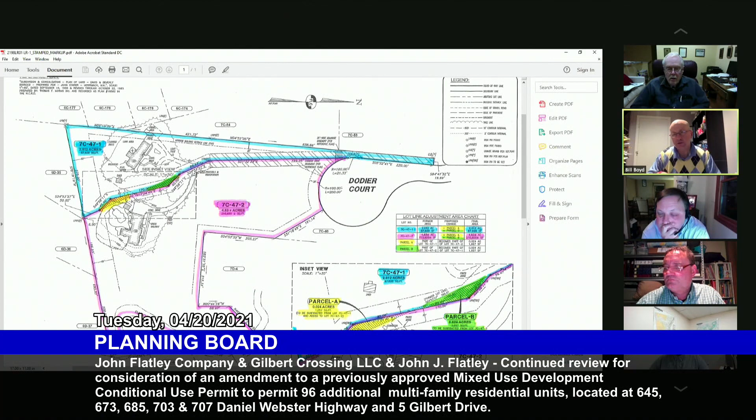Correct. The submittal deadline for the April meeting was passed, so they would need to get on the May 26th ZBA agenda. So then the planning board would be looking at having it on the first Tuesday in June, potentially. That would be June 1st. That's what I would say if you want to go to a date certain. Yes.

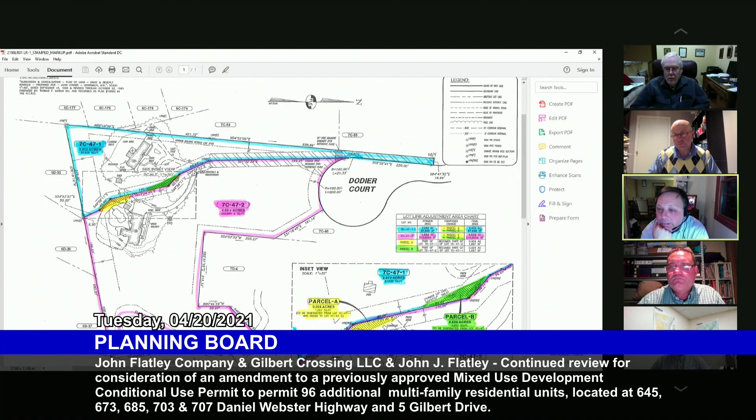So since they've got to go to the May 26th ZBA no matter what, bringing it back to us would be 5-6 days later. Yes. And then they'd clear all their hurdles. Or if we voted to approve it tonight, they'd be 5 or 6 days ahead when they got their relief in May 26th, assuming the ZBA didn't screw around with their property lines at all. So go ahead. Sorry. No, go ahead, Robert.

Go ahead. We basically would be doing the review in anticipation, I guess, if you will. Maybe the review of the plan would be done probably towards the latter half of that week quickly. But we could still do it after the decision. We'd still have to notice it ahead of time, or the legal notice would be issued and be posted to the agenda. We operate under the assumption, I guess, at that point, since the time frame is so close, that the ZBA would grant the variances, as it seems to be a routine type of situation here.

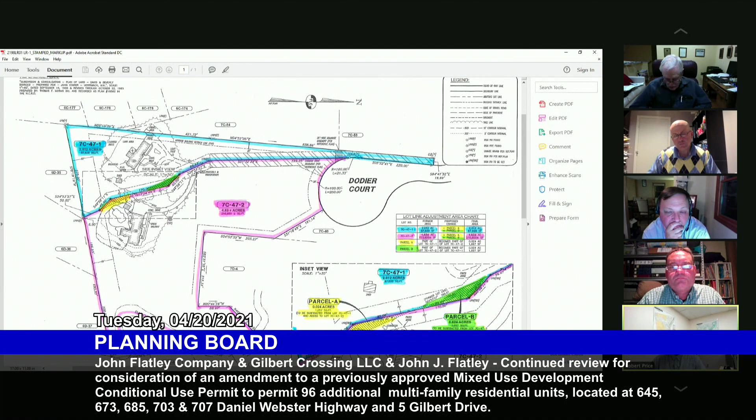As you know, when anything happens, and if something does muck that up, then we would do another continuance or deal with it as it needs to be dealt with. Otherwise, if everything does end up going smoothly, then it would be ready to go on the first. So the variances they would be seeking would be to have less lot frontage on Dodier Court because the regulations have changed since the time of their original subdivision, and obtaining variances is necessary in order for the planning board to entertain the lot line adjustment that's between the two homes and the correction of the easement. Yeah. Okay.

Up to you, board. Do you want to find it complete and make determinations tonight, or the staff's recommendation is that we continue it to after the ZBA meeting, which we could frankly put on our June 1st calendar if we chose to do that? Mr. Chairman, I would move that we consider the plan complete as there's enough information on the plan to invoke the board's jurisdiction to make an informed decision. Is there a second for Bill's motion? I'll second it for the purposes of discussion. Does anyone want to discuss the idea of it being complete or not complete?

Nelson, you have a hand up. Yeah, I was going to go the other way with this. Let's send it back to the ZBA. Let them do what they have to do to it. Get the driveway shown on the plan and come back with one plan that cleans it all up. That's what I would prefer to do. That would be my recommendation. I agree with Nelson. If we were just dealing with that one single property line issue, then I would have no problem with finding it complete and voting on it tonight. But to complicate it, and we're just going to be 6 days after the ZBA, send it to them, figure it out, and then bring it back to us.

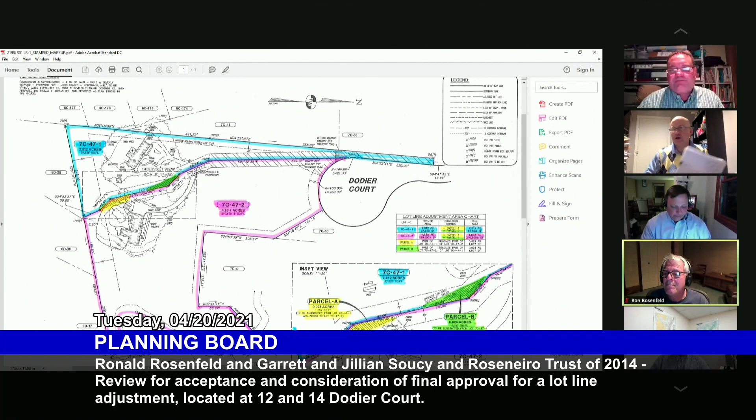Thank you. We are up to item 6, which is discussion and possible action regarding other items of concern. There is a bullet point on my agenda indicating that Synergy Self-Storage and 401 DW Highway apartment conversion is looking for an extension of their conditions of approval. Robert, is there anything that we should know about that item?

Just want to make clear, since I know we've seen Synergy a few times, they are essentially at the point of being done. All I need is a couple of waivers noted on the final plan, and that will be done. And in terms of the 401 project, they're down to their final item, which they are working out with Public Works right now. And assuming this stuff gets sorted out, I could feasibly have plans as early as tomorrow.

Okay. Potential 6 month extension of deadline to meet conditions of approval. What's the will of the board? So moved, Mr. Chairman, per the recommendations of Mr. Price. Second. Second by Nelson Disco. Let's do a roll call vote. Paul? Vote aye on the motion. Bill Boyd? Boyd votes aye. Nelson Disco? I vote aye. I vote aye as well. 4-0-0 to provide those extensions.